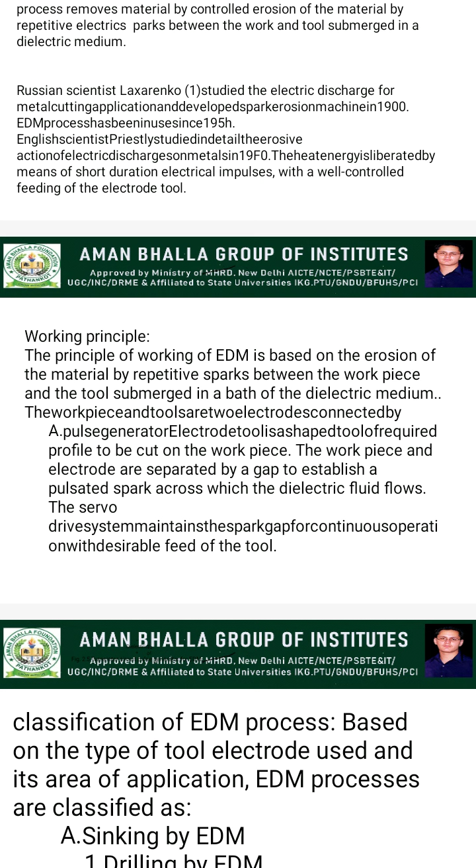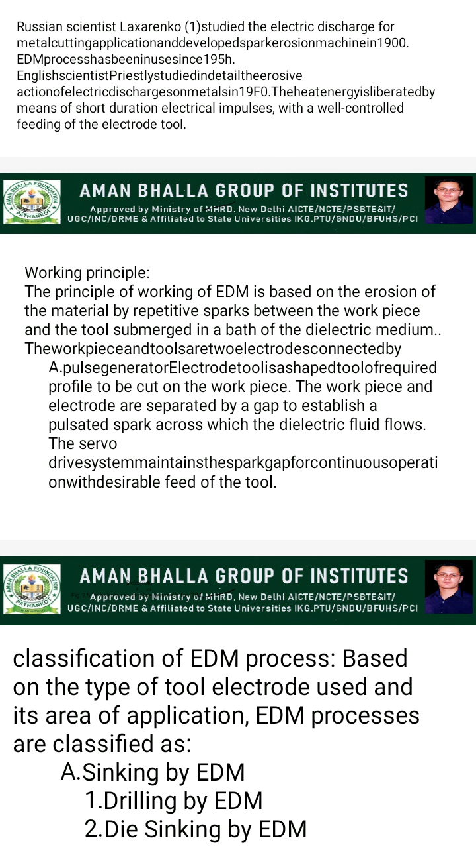Next is the working principle. It is based on the erosion of material by repetitive sparks between the workpiece and the tool submerged in a bath of dielectric medium. The workpiece and the tool are two electrodes connected by a pulse generator and a servo driving system. In the pulse generator, the electrode tool is shaped to the required profile to be cut on the workpiece. The workpiece and electrode are separated by a gap to establish a pulsating spark across which dielectric fluid flows. The servo driving system maintains the spark gap for continuous operation with desirable feed of the tool.

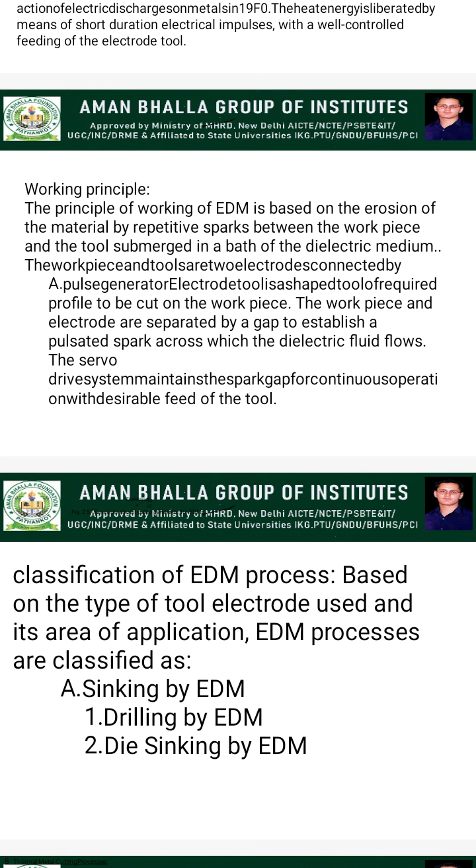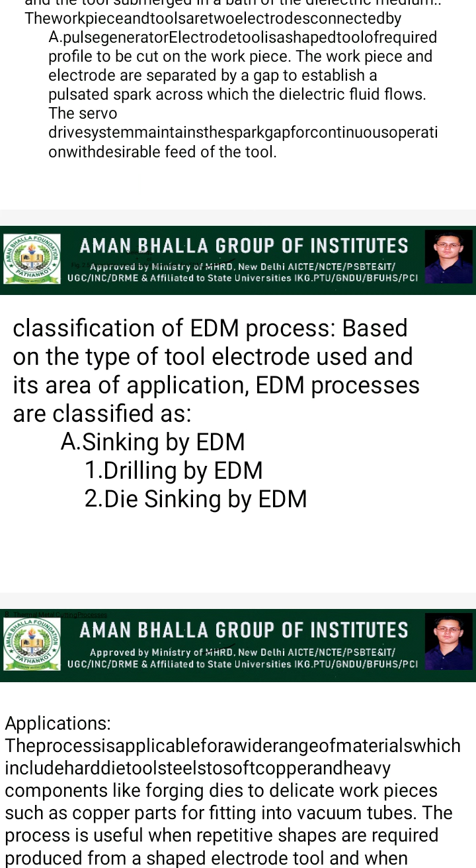Next is the classification of electrical discharge machining, based on the type of tool electrode used and its area of application. These are classified first into sinking EDM, which is further classified into two types: drilling EDM and die sinking EDM.

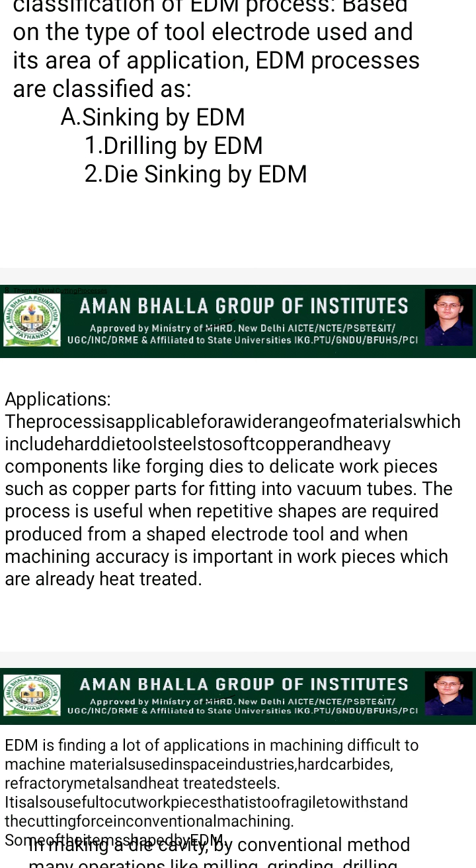Next are the applications of EDM. The process is applicable for a wide range of materials including die, tool steel, soft copper, and heavy components like forging dies, down to delicate workpieces such as copper parts for fitting into vacuum tubes. The process is useful when repetitive shapes are required, produced from a shaped electrode tool, and when machining accuracy is important in workpieces that are already heat treated.

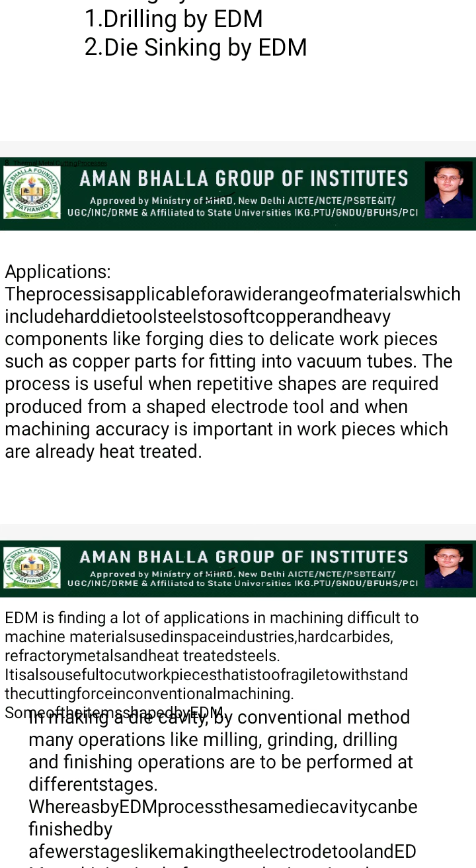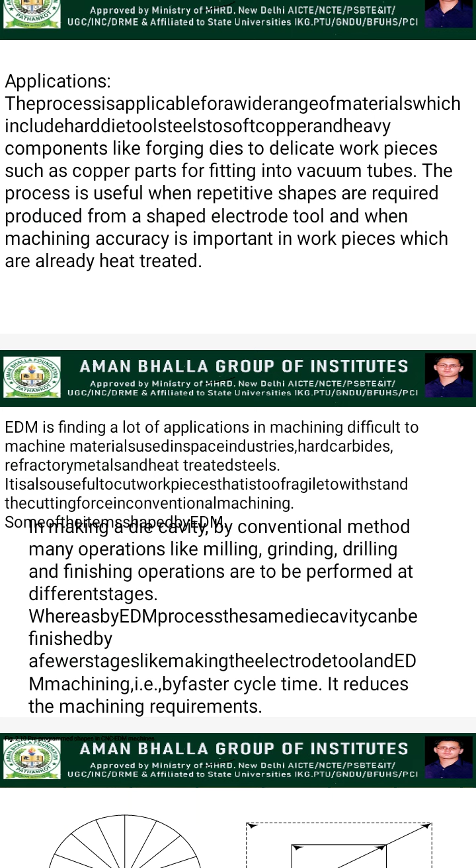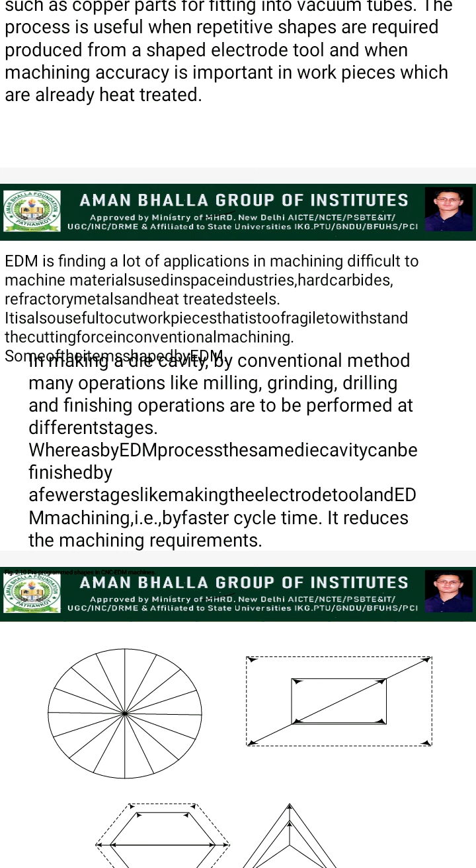It reduces the machining requirements. A higher material removal rate produces a rough cut surface with a molten recast structure, with poor surface texture and low fatigue properties.

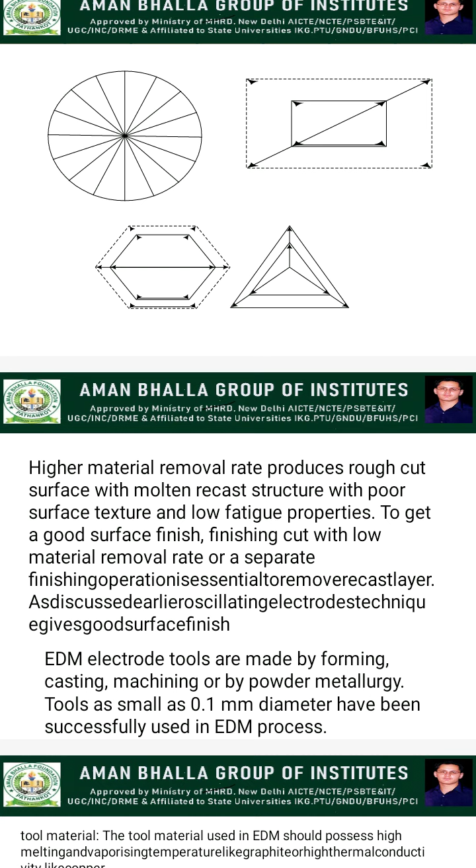A separate finishing operation is essential to remove the recast layer. These are the figures of electrical discharge machining.

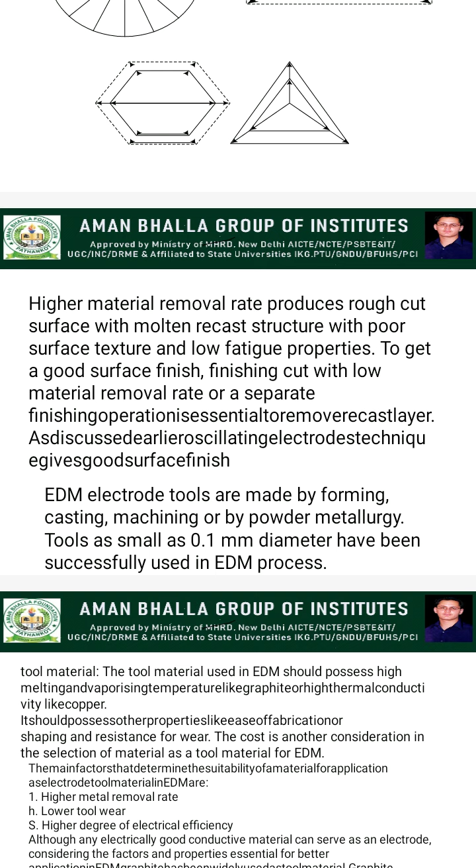Next, electrode tools are made by forming, casting, machining, or by powder metallurgy. In EDM, tools as small as 0.1 mm diameter have been successfully used in the process.

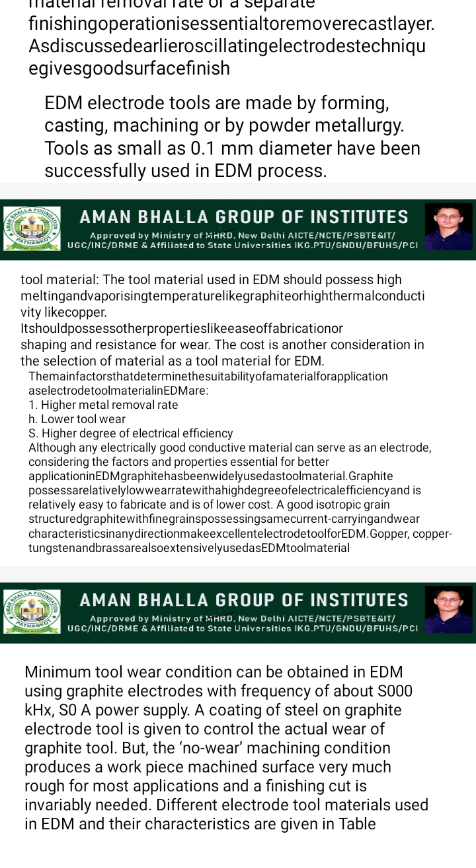The tool material used in EDM should possess a high melting and vaporizing temperature like graphite, or high thermal conductivity like copper. It should also possess other properties like ease of fabrication. Cost is another consideration in the selection of electrode tool material for EDM. The main factors determining the suitability of a material as electrode tool material in EDM are: higher metal removal rate, lower tool wear, high degree of electrical efficiency, and minimum tool wear.

This condition can be obtained in EDM using a graphite electrode with a frequency of about 5000 kHz, 50 A power supply.

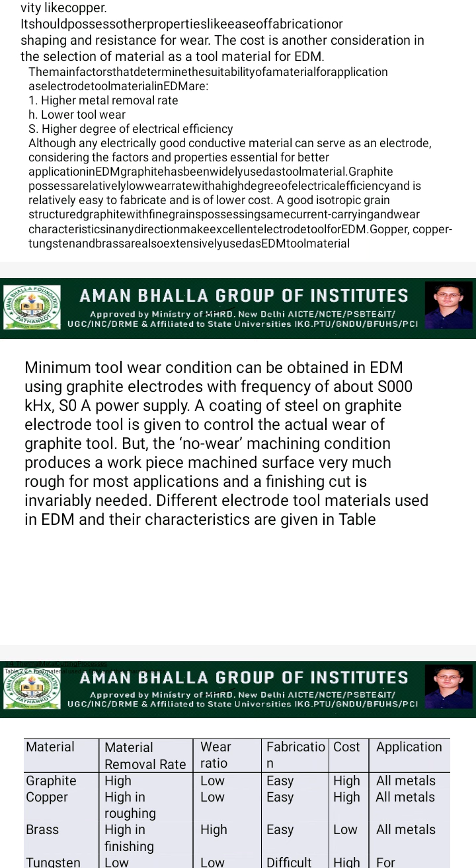A coating of steel on graphite electrode tool is given to control the actual wear of the graphite tool, but the no-wear machining condition produces a very rough workpiece machined surface for most applications, and a finishing cut is invariably needed.

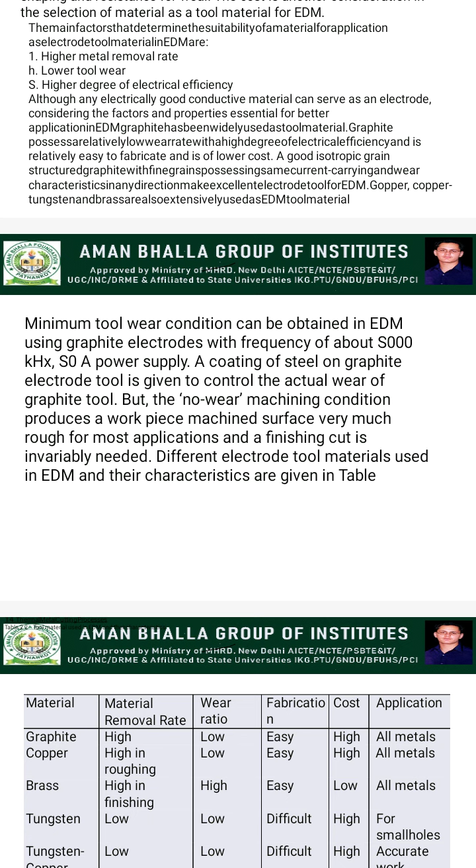Different electrode materials used in EDM are characterized in the table shown in the slide. The first column lists different types of materials: graphite, copper, brass, tungsten, copper alloys, cast iron, steel, and zinc alloys.